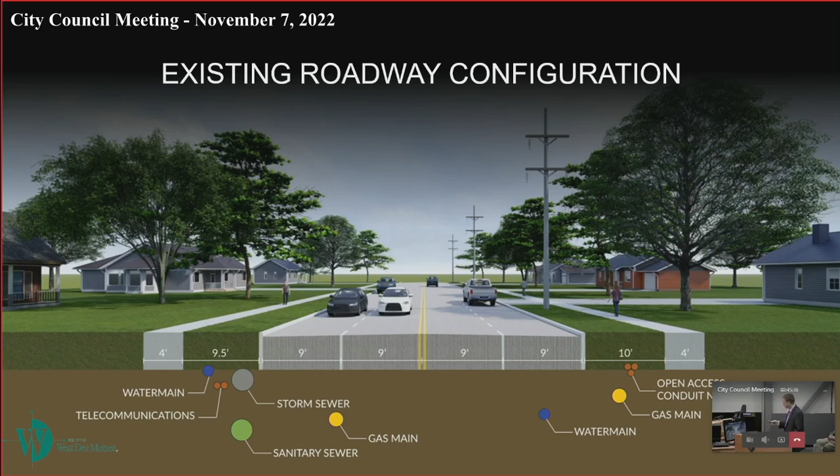As Brian mentioned, the plan is to change to 3 12-foot lanes. So those 3 12-foot lanes are the same width, 36 feet, as the 4 9-foot lanes. So the road is essentially in the same spot, other than a couple turn lanes that we'll talk about. It adds the shared use path on the north side. So this graphic, you'll see this several times. When you look at this, this is facing east. Shared use path is on the left, that would be the north side. And then we've got some dimensions on here that we'll go over how we got to each one.

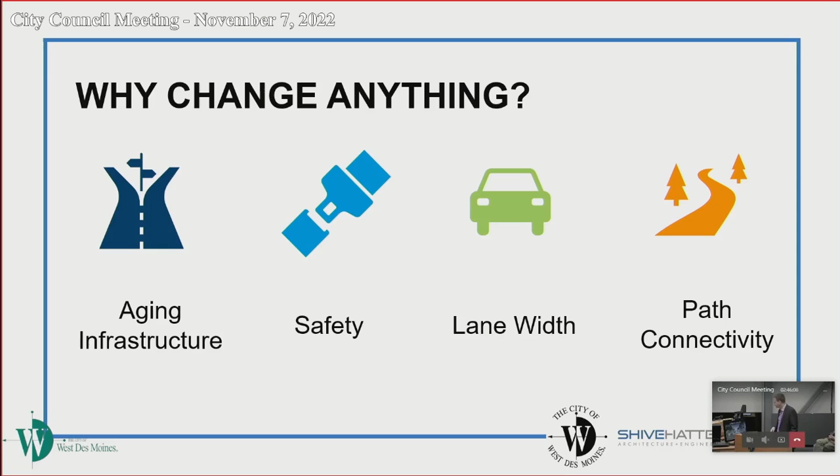So backing up a little bit, what is the need and why would we want to change anything? First, the infrastructure is old. Some of this was paved as early as the 1920s. There was lots of paving done in the 1960s and 70s, some widening and reconstruction. We've done some asphalt overlays, mill and overlay, really just the top 2 inches. Eventually, we have to tackle the whole problem, and while we're at it, we'll fix some of the concerns related to storm sewer and other utilities while we're there.

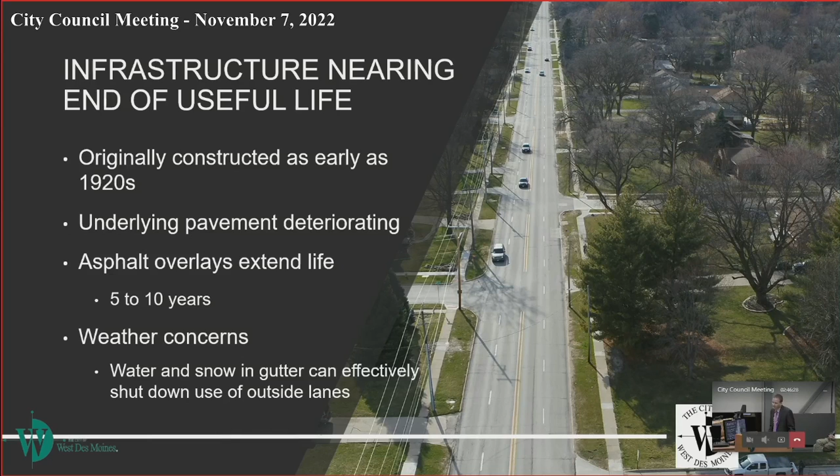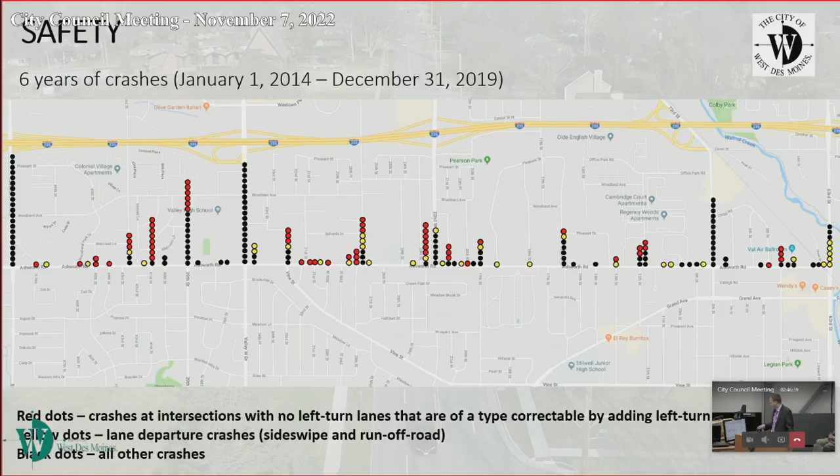Safety is the other part. This is some crash data. The takeaway here is the red and yellow dots are preventable with the type of work we're planning to do here. We've got a lot of detail on those accidents if we need to go into them. I'm not going to talk about these specifically - Eric Peterson, Principal Traffic Engineer for the city, has a ton more detail here as well.

So talking about the safety benefits, the 4 to 3 lane roadway conversion that Brian mentioned - the biggest benefit there is today when you try to cross that street, if you're on a side street, you've got to cross 4 lanes, 2 in each direction. When you go down to 3 lanes, you have a single lane of traffic in each direction with the turn lane in the middle, so you only have 2 through lanes of traffic to cross. So you cut the number of conflict points in half if you're crossing the street or if you're turning onto the street, as shown in this graphic here.

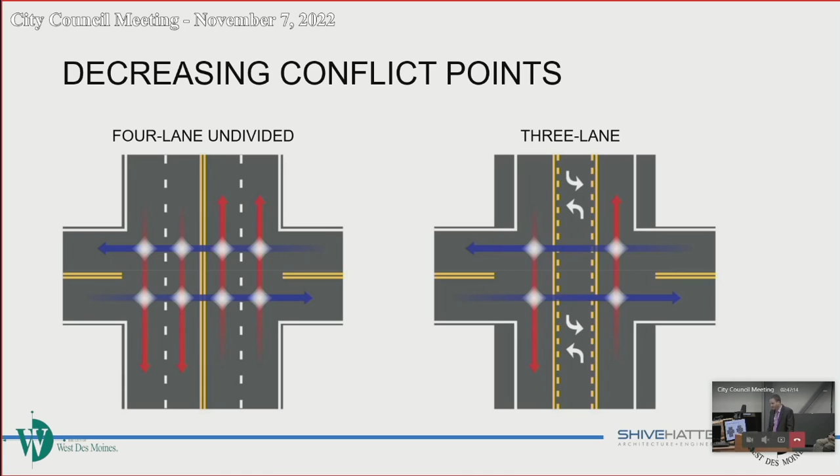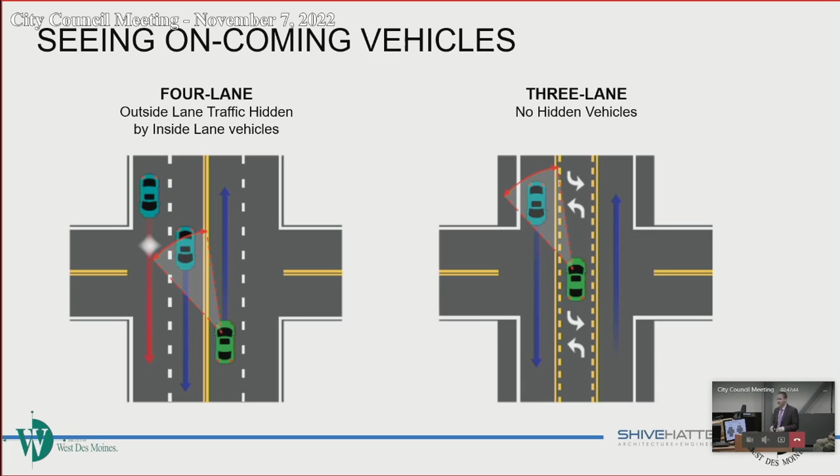Similarly, when you go to turn, if you're on Ashworth and you want to make a left turn, today you stop in a through lane as you signal to go left. You're subject to a rear end collision there. In the 3 lane roadway section, you can move out of that through lane and into the shared turn lane as you wait to make your left turn. When you do go to make your left turn in the condition today, on the left, you have to cross 2 lanes of traffic - sometimes you cannot see the car behind the car in the inside lane, you can't see the car in the outside lane. In the 3 lane roadway section, you only have a single lane coming at you, so you can see all the traffic that's approaching you. This is an example of what happens when you don't have that visibility that you would in a 3 lane.

So this was an accident at 39th and Ashworth in September, right near Valley High School. That black SUV that made the left turn couldn't see the oncoming gray sedan because it was blocked by the cars in the left turn lane.

This is the exact type of accident we're talking about being able to prevent with the 3 lane roadway section. One more point I want to make here, where the SUV ended up, it went over the curb into the grass. So anytime we can put a distance between any pedestrian or bicycle facility that's not on the street, we like to maximize those.

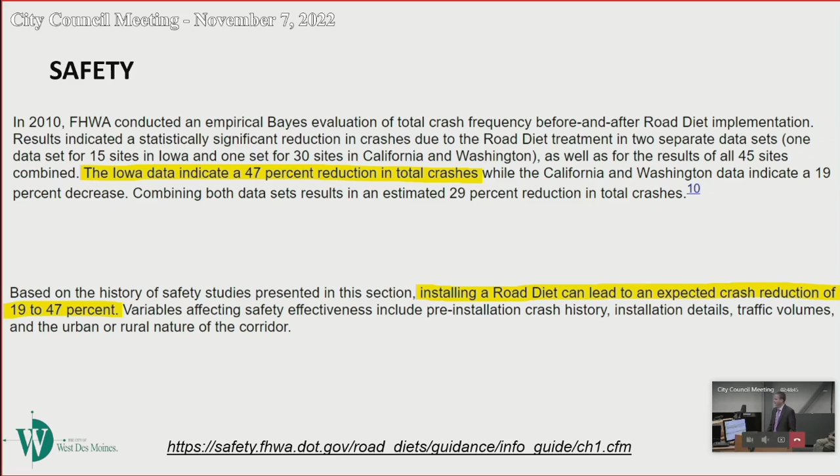Safety data, I'll go through this real quickly: 19% to 47% reduction in crashes when you change from a 4 lane to a 3 lane street. That's from the Federal Highway Administration. There's a lot of academic studies that went into that, and that's the data that is the result.

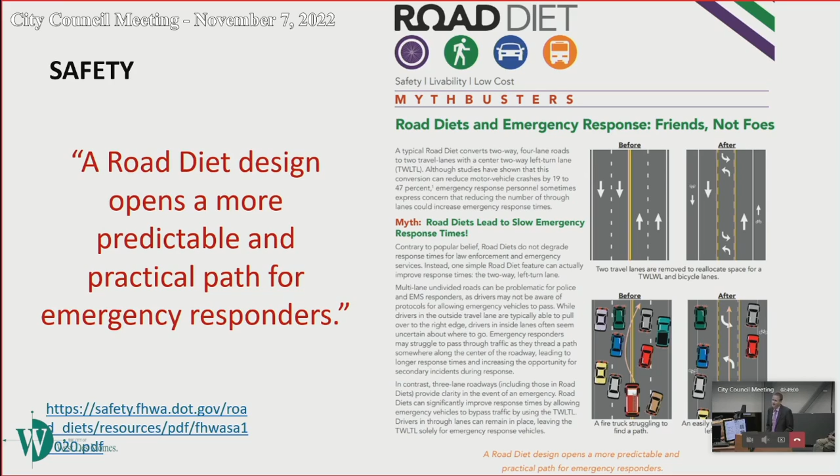Another item on safety: today, when you have a 4 lane roadway, if there's a traffic accident, sometimes that can get clogged up in all 4 lanes because you've got traffic in all 4 lanes. The 3 lane gives a predictable path, again from Federal Highway Administration, for emergency responders. We also spoke to Chief Leu. He agrees and supports the 3 lane roadway section as far as emergency response goes in the city of West Des Moines.

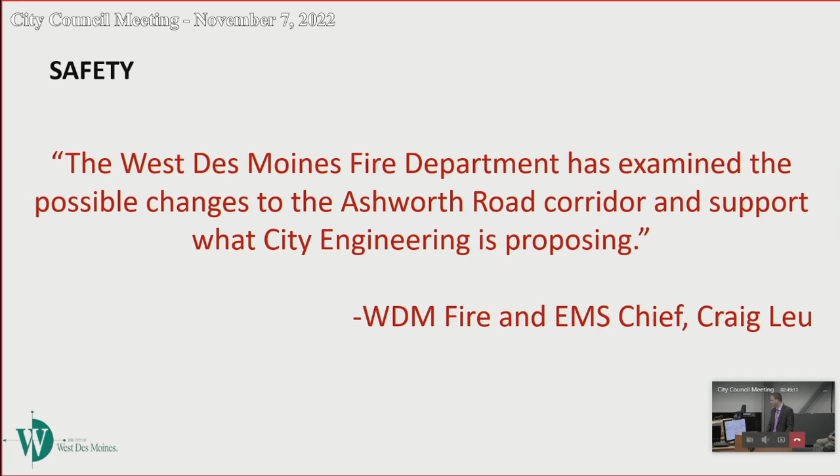What we see a lot of times, because people are uncomfortable with those narrow lanes, they stagger. The picture on the left is vehicles staggered: one in the outside lane, one in the inside lane, one in the outside lane, and they just drive that way. So a lot of times it functions more like a two-lane street, which supports the three-lane ideology where there's one lane in each direction that can still operate efficiently. Photo on the right, when they do go to pass, they hang over the lane line, actually in oncoming traffic in that scenario.

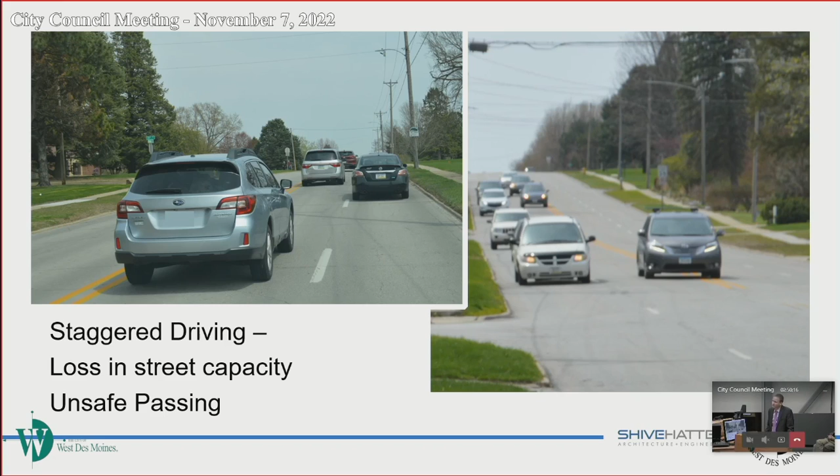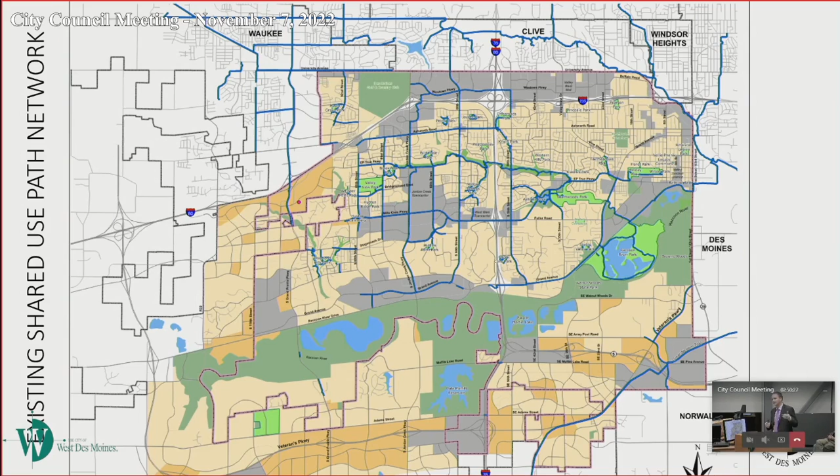The path specifically: this is the map of the whole city. The bottom and left sides are mostly undeveloped. Where you see all the blue lines, that's the existing shared use path network. As we zoom into the upper right-hand corner, this map is bounded on the left by Jordan Creek Parkway, south by Mills Civic Parkway and Fuller Road, and the city limits on the north and east. North is up here. The upper right-hand corner is the area we're talking about. It's a trail desert; there are no trail and shared use path infrastructure existing today in that area.

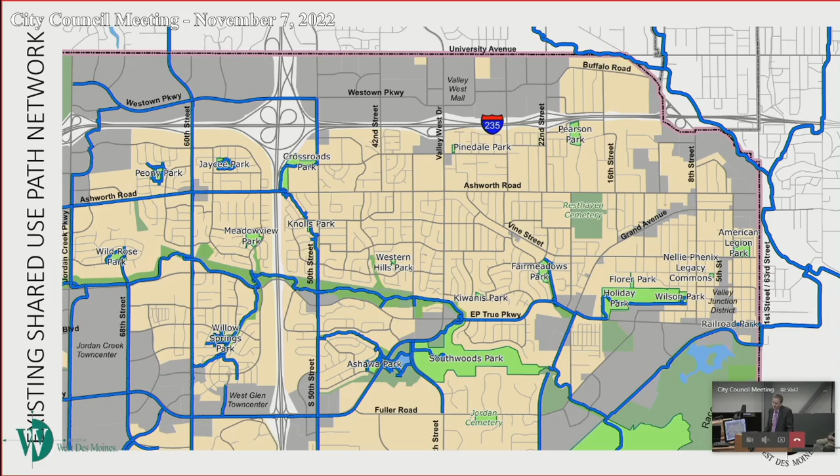When I change the slide here, there'll be a red line in that spot. That red line is where we're talking about putting this. That becomes the backbone for any future shared use path, bicycle infrastructure, and trails in the area.

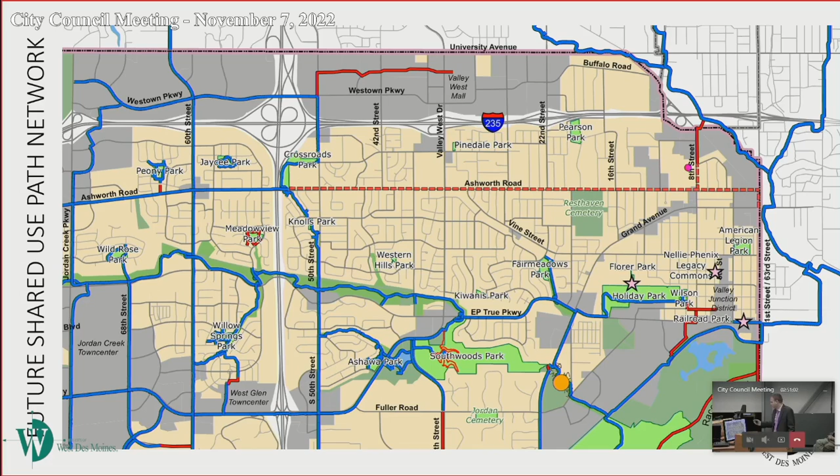Current city master plan for shared use path and trails is this document here. A lot of these are on the side streets that connect to Ashworth, 39th Street, 19th, a couple others. Those aren't planned now, but without Ashworth as the backbone, there's nowhere for those to go. The Ashworth Road is kind of the linchpin to be able to get a shared use path network to provide the same level of service to this area of town as provided to the other areas of West Des Moines.

There's no other spot to get east-west across that portion of the city. No other east-west road goes all the way across, and there aren't any greenways to put the trails in.

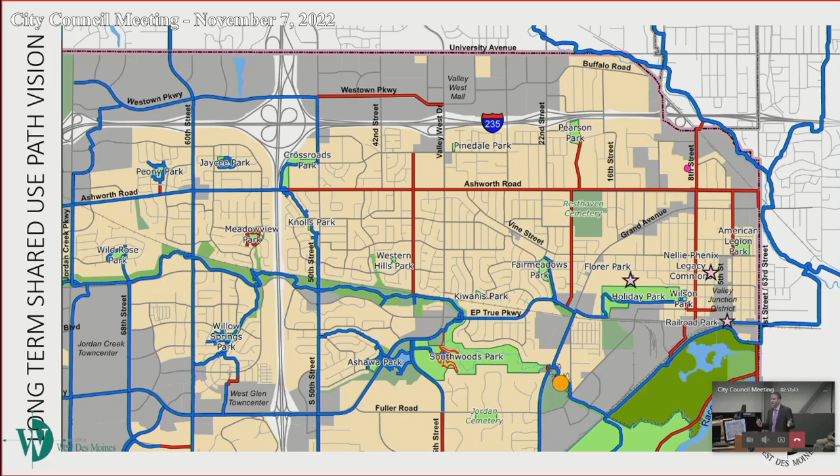So that's credit to all of you, staff, and even the residents, about the great job the city of West Des Moines does. And because of that, there's only one high priority listed for any city department in the whole city, and that's street maintenance. So we're hoping to take care of that here with the road project.

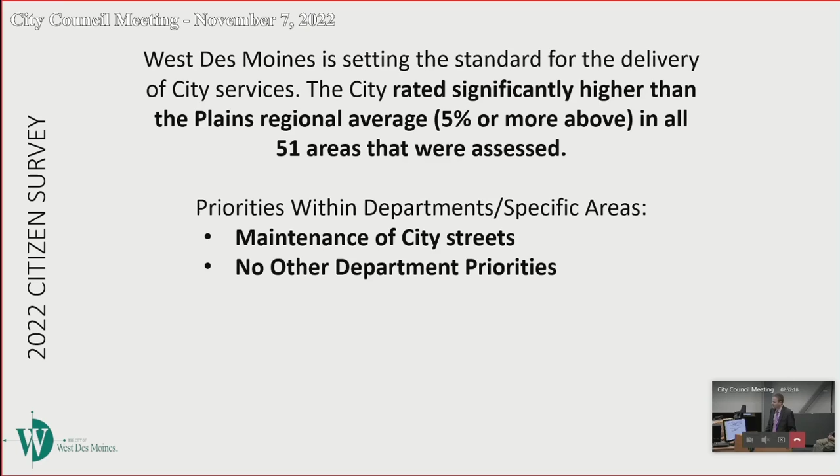But when we actually dive into trail and Parks and Rec, there are areas for service that need to be emphasized in lots of different departments. So for Parks and Rec, number one and number two are walking and biking trails within the city, and access to desired destinations via that network of walking and biking trails. Those are consistently the number one and number two Parks and Rec services that people ask for in these citizen surveys, far and away above all the others.

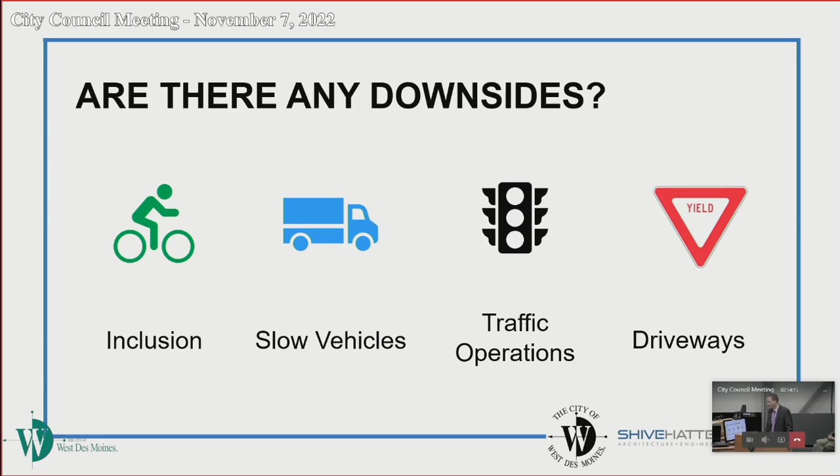So the first one: on the road today, there is no dedicated bicycle facility. Yes, you can ride on the sidewalk, that's legal. Yes, you can ride on the street, that's also legal. When we drop from 4 lanes to 3, though, we're taking away that lane that bikers do use today, and putting all the traffic into one lane. So right now, if there's a bicycle in that outside lane, people can pass using the other lane because you've got 2 lanes in one direction. That goes away in the 3-lane roadway section.

So we're really taking away some comfort—even the bikers on the street today will probably feel less comfortable in the 3-lane section, because they'll be passed in what is essentially the center lane, which is not a passing lane. That's why, if we don't put the shared use path in, we can't provide for that mode of transportation at all. Yes, it's legal to ride on the sidewalk, but no, it's not designed for that. The shared use path is the only portion of this actually designed to accommodate a bicyclist. Without it, we don't accommodate that mode of transportation.

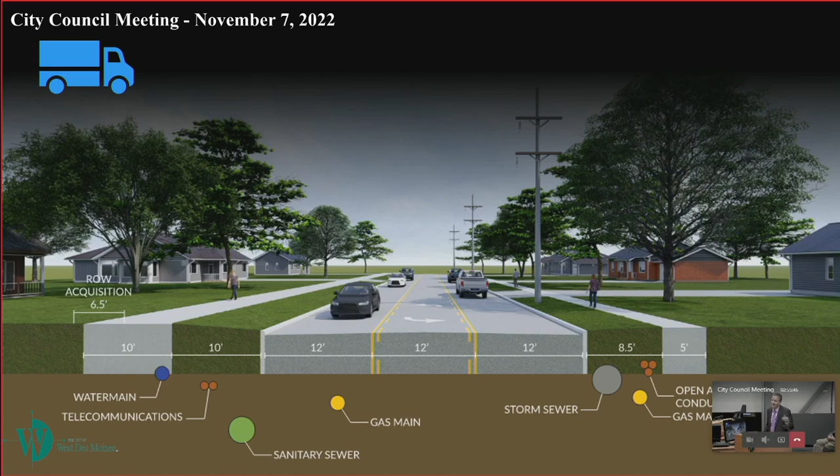Slow-moving vehicles are another concern, similar to the bike in the outside lane—if a delivery truck stops out there, how do you get around it? That's a concern, and we'd expect people to pass in that center lane. Now, that's a stopped vehicle, not a slow vehicle like a bicycle might be. But on the flip side, with that single lane, when there's a slow vehicle, or even someone driving the speed limit, the person who today would speed down Ashworth using both lanes to merge in and out gets caught behind anyone driving the speed limit. So potentially the highest-end speeds will come down with the 4-to-3 lane conversion.

So it's only 2 right turn lanes in this entire stretch? 19th and 22nd, 2 that do not exist today. Valley West, 8th Street, some of those exist today. Okay, only 2 additional, yes. 2 additional.

The other part, relative to the path, there's a lot of driveways and street crossings out there. It would be great if those didn't exist and we had a shared use path or a trail without any obstructions, but there just isn't another spot for it. There's nowhere else to put it.

Ma'am, I'm sorry, I'm going to interrupt. This is exactly what I'm talking about. I understand you're adamantly against it, and that's fine, and I respect that, but I'm going to ask no outbursts. You'll have your chance to speak.

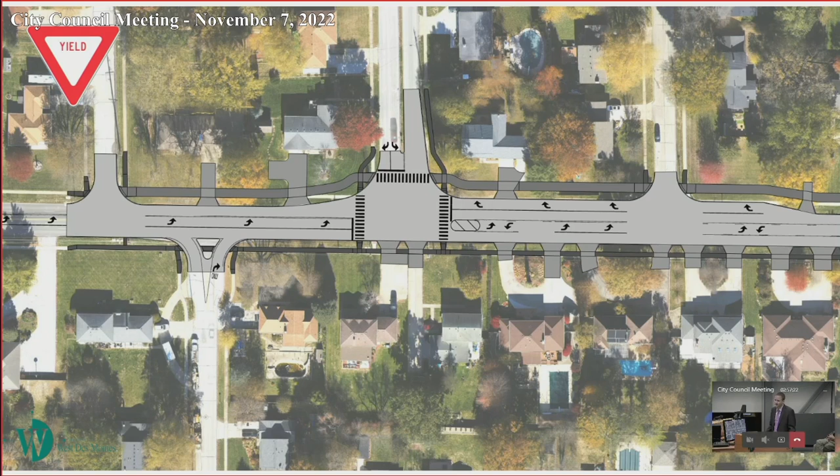It's also not uncommon to have a shared use path cross driveways and streets. They're found along almost every collector and arterial street in the city of West Des Moines, and any new street has them as well, of that classification.

The other negative is right-of-way acquisition. We're going to talk a lot about this, I'm sure, and we'll hear it. This is a slide from the 19th to 23rd public meeting. In that stretch, the first project to be built, we've got enough design done that we know what we need for right-of-way acquisition. That may change here today, and that's fine, but we don't have the design done elsewhere. We wouldn't say that, but we have enough done to talk to homeowners about the specific needs and get appraisals done.

When we have an appraisal done, there's a professional real estate appraiser hired by the city. They go out and appraise what this piece of right-of-way is worth, what is the value of anything in it, trees, landscaping, et cetera, whatever it might be. What is the value of the overall property? Is there a diminished value when we're done? We take all those things into account. Residents have the opportunity to meet with those appraisers. They also have the opportunity to seek their own appraisal if they don't agree, before we move into the negotiation phase and eventually transfer of title if needed.

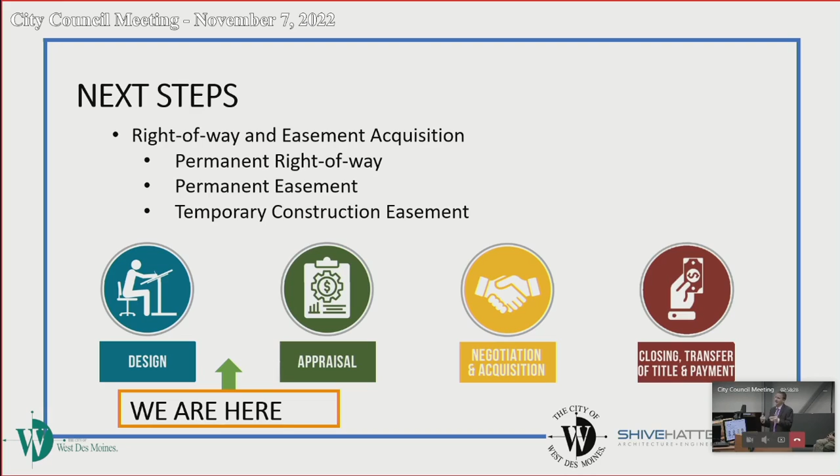A couple things on property value. There's some data from the National Association of Realtors and National Association of Home Builders about amenities like shared use paths and trails being desirable when people seek homes. Again, those would probably be better in a green space. That doesn't exist, but that doesn't mean they still don't want access to them in this whole area of town.

Furthermore, there's some data out there about the roadway conversion itself, the road diet, 4 to 3 lane conversion, showing those don't impact property values negatively. In fact, I think the road today, when you go out there, feels like a busy street even if there's no cars, because it's got 4 lanes. It'll feel a little more like a collector street, which is a lower classification of roadway, when it only has 1 lane in each direction.

Potentially feels less busy. So what are the details and where do we get the guidance from? So, again, this is the configuration.

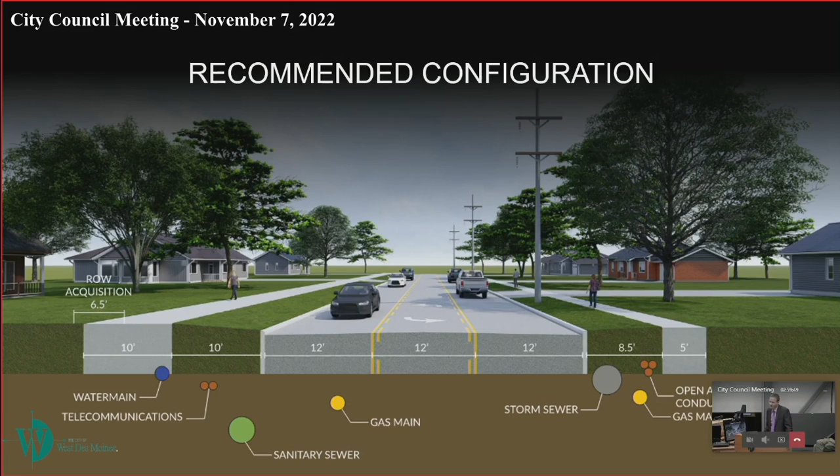We're going to try to walk through how we got the numbers on here, the 12 foot, the 10 foot, all those things. There's a lot of guidance out there. Some of the guidance is national, some of it's local. We end up using the local data or the local guidance. The local guidance, though, comes from the national guidance. The national guidance takes into account all the research on the subject, and then we rely on those to follow through. And then they're all guidelines. We can make changes to them as we need.

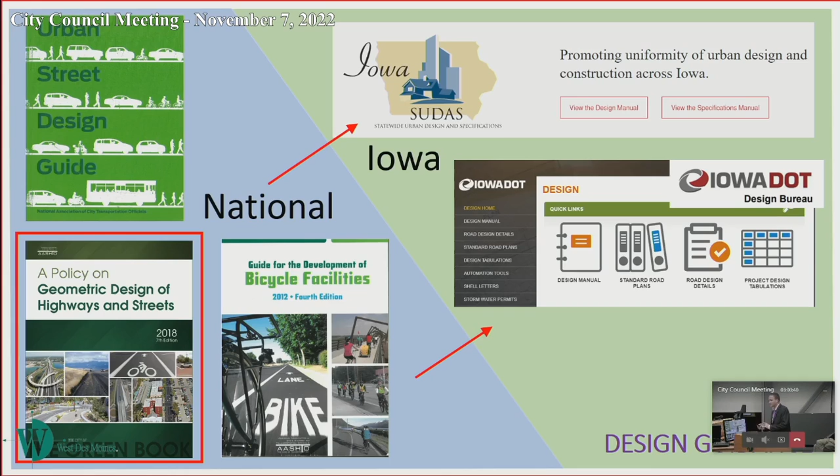One of them in particular, in the bottom left-hand corner, that one takes into account lots of different context, what the land use is, what the speed limit is, is it urban, suburban, rural, and a lot of that data flows down into these guidance. So one on the top right, that's SUDAS. That is an Iowa guidance called Statewide Urban Design and Specification, SUDAS. We'll talk more about that. And a lot of the items come from that SUDAS document, but the national guidance flows into those and how it's applied in Iowa.

So I want to talk a little about SUDAS values and lane width. So the top is the preferred values from SUDAS for this type of road, this classification, residential, 35 mile an hour speed limit, minor arterial, and how wide things should be. So total is 43 feet. So that's 12 foot through lanes, 14 foot center turn lane, 2.5 foot curb offset on each side.

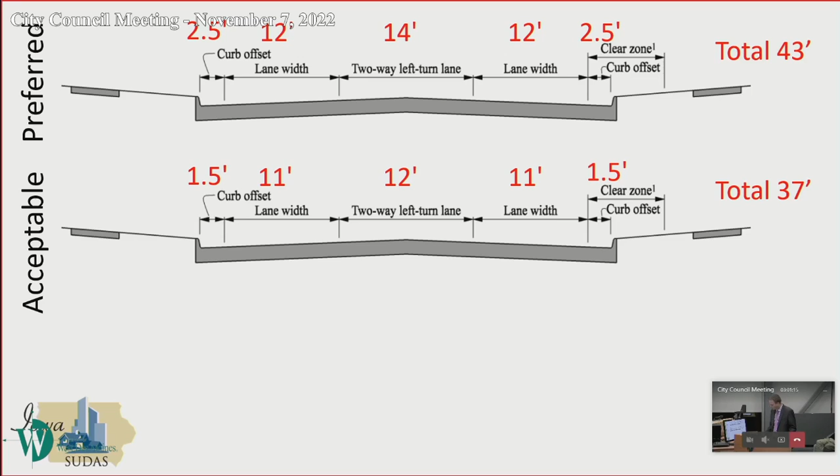Acceptable guidance in SUDAS, the next one down, totals 37 feet. All the numbers shrink down a little bit. So I talked about before, we're actually proposing 36 feet. So we're smaller than what SUDAS would say is acceptable. Acceptable is their lowest level of guidance.

Now, I think someone could say, well, is it actually going to work? Yeah, we believe it will. There's other 36-foot wide 3-lane streets in the city of West Des Moines that function just fine. The point I want to make is we've narrowed the roadway as much as we could, and I'll talk more about that and some alternatives here in just a few minutes.

And the biggest difference is that curb offset I've highlighted in yellow. We set that at 0. So when we saw that DART bus shying away from the curb, that's because there's not a gutter section or an offset from the lane width to the face of curb. So you can't just look at the lane width being 12 feet when you consider how wide they should be. If we called these 10-foot lanes with a 2-foot curb offset, we'd have the exact same width. And it'll really function more like a 10.5-foot lane or maybe an 11-foot lane than it will an actual 12-foot lane because we don't have that guidance on the side or that offset on the side.

Is that just a semantic difference for the most part, going back to that, just out of curiosity? Yeah, I mean, we could call it 10-foot lanes, 2-foot offset, and it would, again, be the same thing. The standard, if somebody comes in to develop a new collector street, and they say it's going to be a 3-lane roadway section, it's the same 36 feet, 3-12s, that's done. And how we name it, it's a little bit less confusing when we call it this way, because if you go out there with a tape measure and measure it versus if we said, well, 10 and 2, there's no physical delineation there. There's not a line painted or anything like that. Okay, thanks.

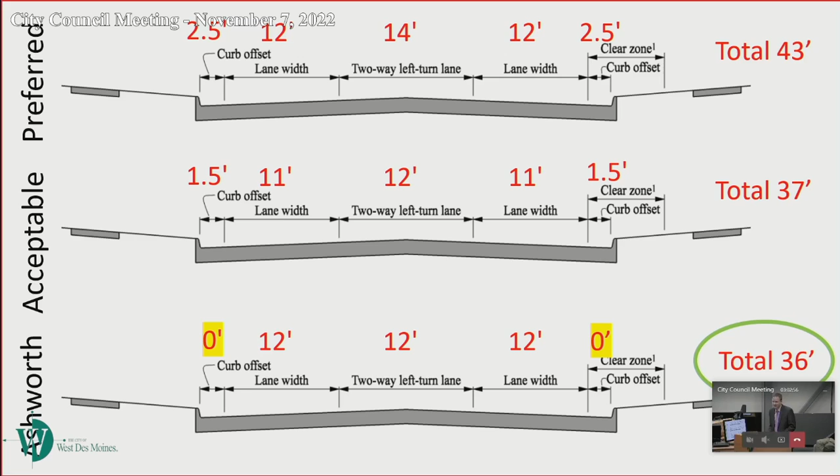Total right-of-way width, minor arterial, if you were to build a new one today, typically 100 to 120 feet to fit everything in, including utilities and all sorts of things I'll talk about here in a minute. This one is currently proposed at 72.5 feet. So we're cramming a lot of stuff into a small space to try to get the footprint as small as we can.

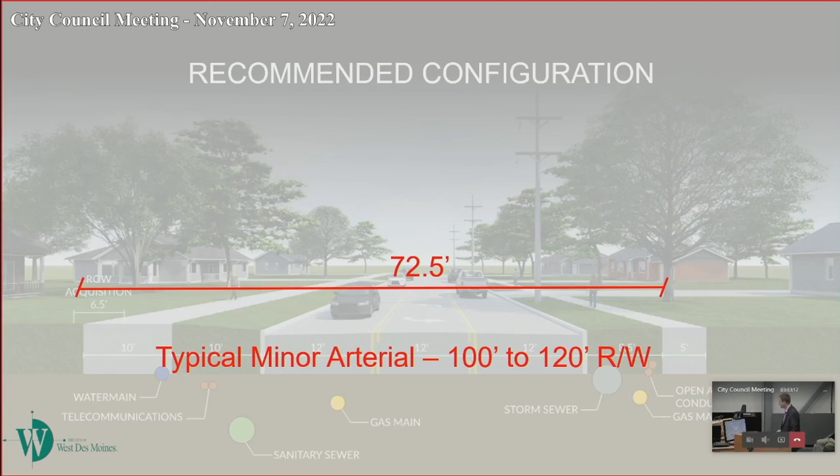One key benefit I want to point out before we get into how we got to all the widths is that once we put a shared use path in, the city maintains it. That's future replacement, cracks, panels, settlement, whatever—those are the responsibility of the city after that, citywide on all shared use paths. The city also takes care of snow removal for all the property owners there. If you have a sidewalk today, you clear the snow. If you have a shared use path, the city clears the snow.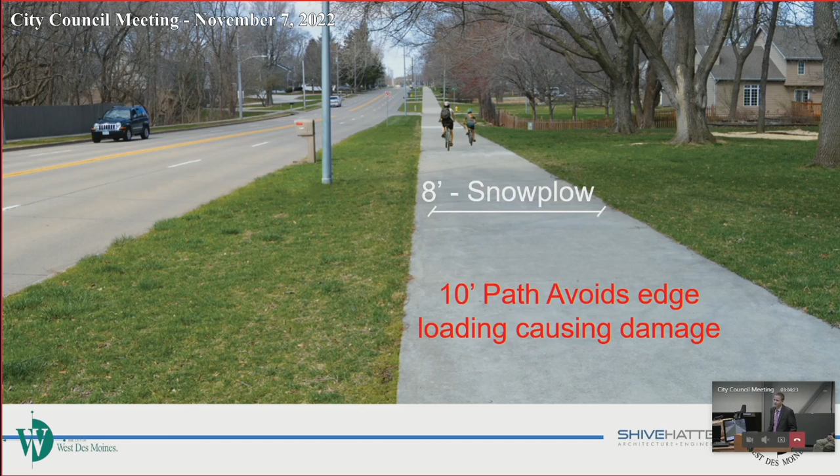So the path is planned at 10 feet wide. Part of the reason is that snow plows are about 8 feet wide, and we don't want them driving right on the edge. If they do, they tend to break the edges of the trail off and crack them, so giving the path extra width prevents that damage. It also keeps the snow plow from getting off into the grass and tearing up people's yards. That's a lot of the reason it's 10 feet, along with guidance from SUDAS, which says to use 10 feet as a typical trail width unless you expect very few pedestrians or don't have regular maintenance vehicles. We don't have either of those—pedestrians are probably the highest use of this potential path, and there will be routine snow removal in the winter months.

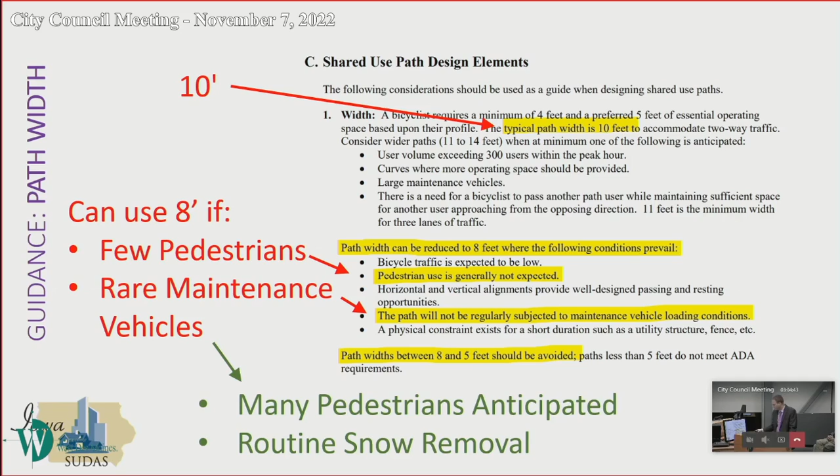So the buffer area, the green space—we showed this at 13 feet through all the public meetings. We did recently reduce that to 10 feet through the 19th to 23rd Street section, and we're going to talk about what's in that 10 feet.

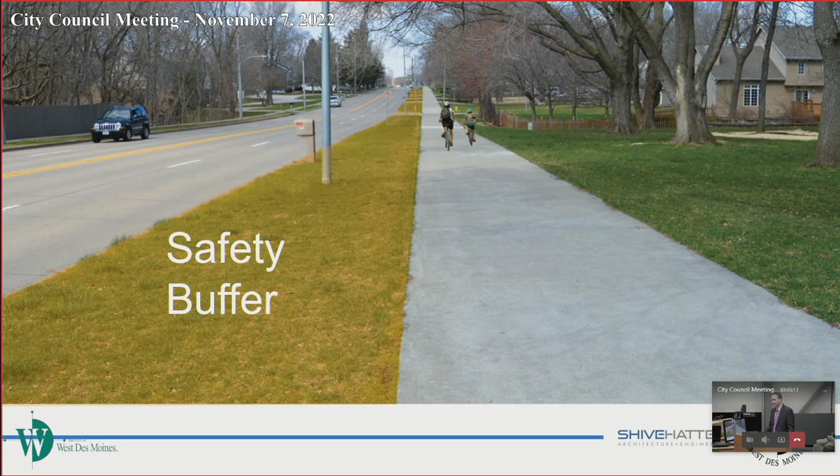The biggest one is a safety buffer. We're trying to keep it away from the street to give people comfort being present there. We talked about that traffic accident—a vehicle leaves the road, where does it go? We're trying to give them a place to get away from it if we can. There are a few things we have to accommodate in there. So 4 to 6 feet is a clear zone—basically we don't want anything immovable in there that a vehicle could hit, like a pole or fire hydrant. Those are out; what I've shown here is fixed objects. Similarly, the trail has a 2-foot lateral clearance—we need it clear of obstructions, even signs or anything that could catch a bicycle handle for somebody going by. So those are all the things we're trying to fit in that area.

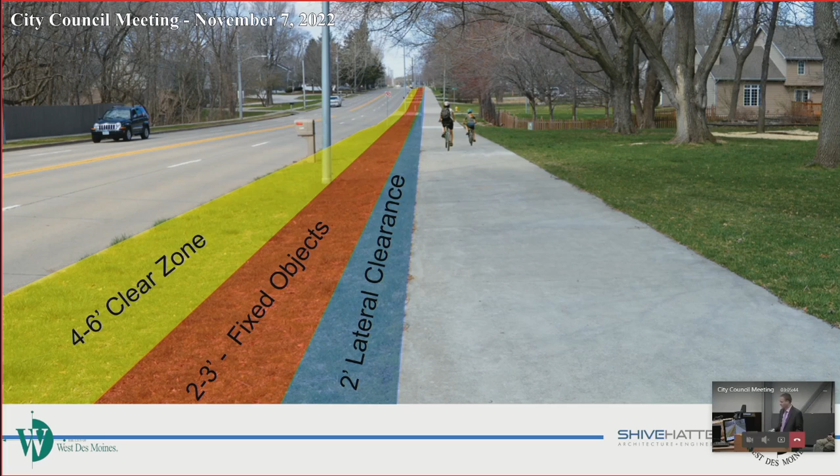Another one is snow storage. We've got to put the snow from the street somewhere, and it ends up in that green space. When the city plows the snow off the trail, it's got to go somewhere too, and it ends up in that same green space. So we need to be able to fit those in there.

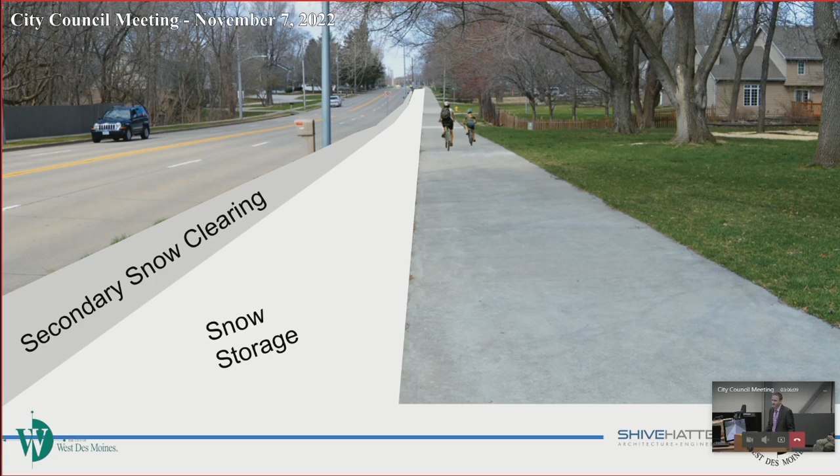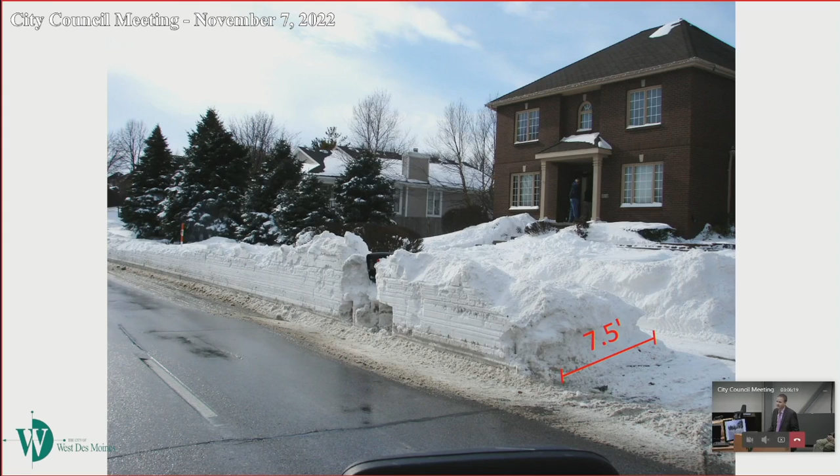And then there's a strip I've called secondary snow clearing. On these arterial streets, Public Services comes back with a wing plow and pushes some of that snow back so they have room for the next snowfall, especially after big snowfall events. So what does that look like? This is on Valley West Drive, a 7.5 foot green space—this one is extreme, but we can get a lot of snow and need a place to put it. Here's another spot on Valley West Drive where it's too close—this is a frequent complaint, where the plows actually throw snow into the path. You can see in the back a piece that's actually slid off. It's just too small.

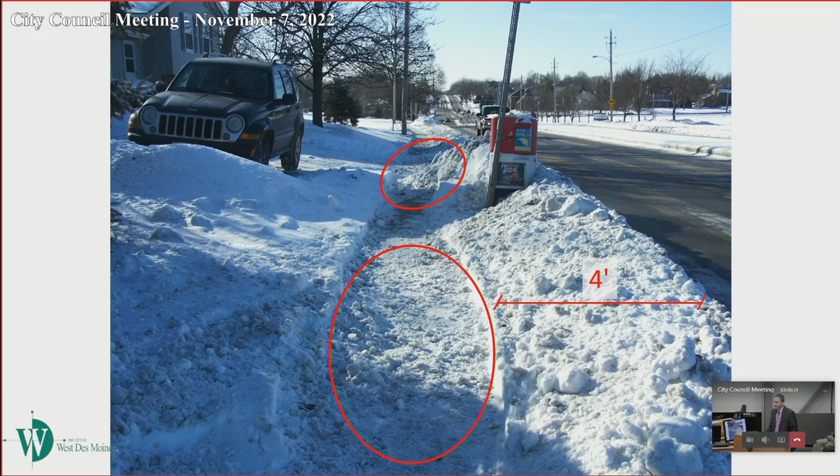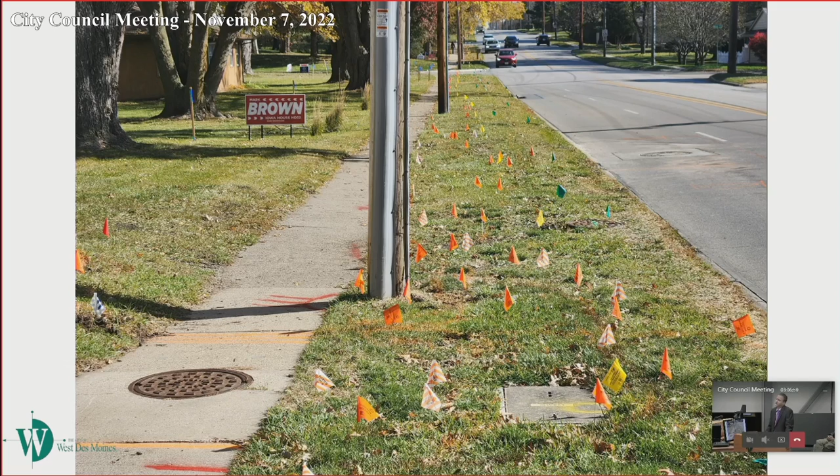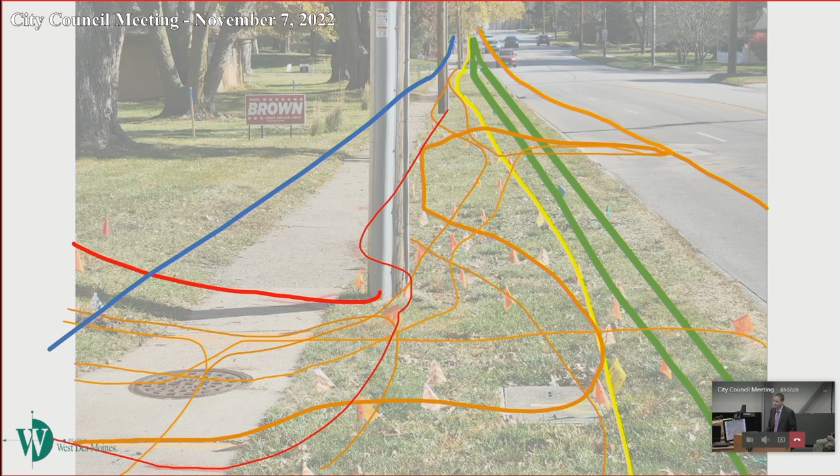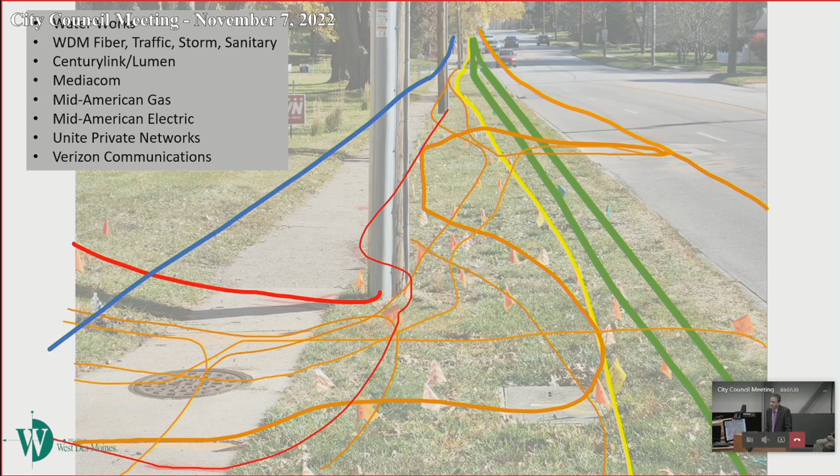Lots of companies out there too - this is just the ones from 19th to 23rd. If you look at that 50-block stretch, there's going to be a whole bunch of people that actually own those utilities. So what else was considered?

Just got a few more slides here. There were lots of things considered. The takeaway I want to leave you with is the first 5 items, or there's 4A and 4B, so there's actually 6 items. This was in the initial study that was done in 2020.

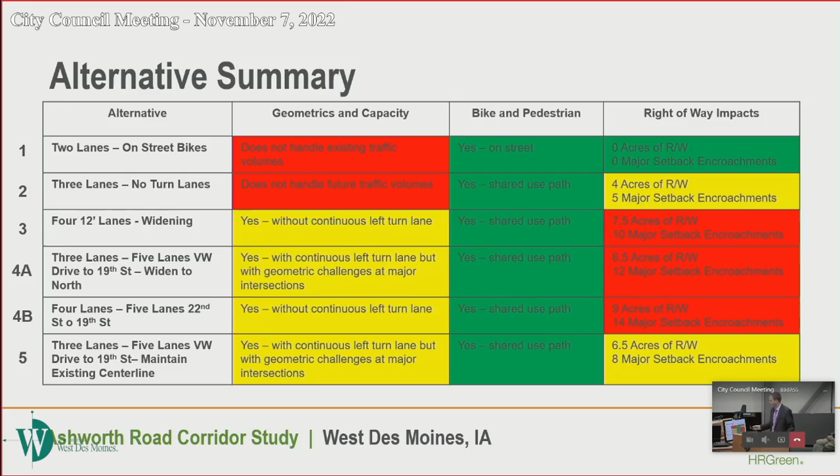When this study got done, it basically said, well, which one of these handles the volume, which one doesn't? There were some recommendations. The first thing staff did was say, hey, we need a different alternative, and they added one that made the roadway smaller. This alternative 6, as it's called in the study, was the smallest footprint of the roadway of all the alternatives considered.

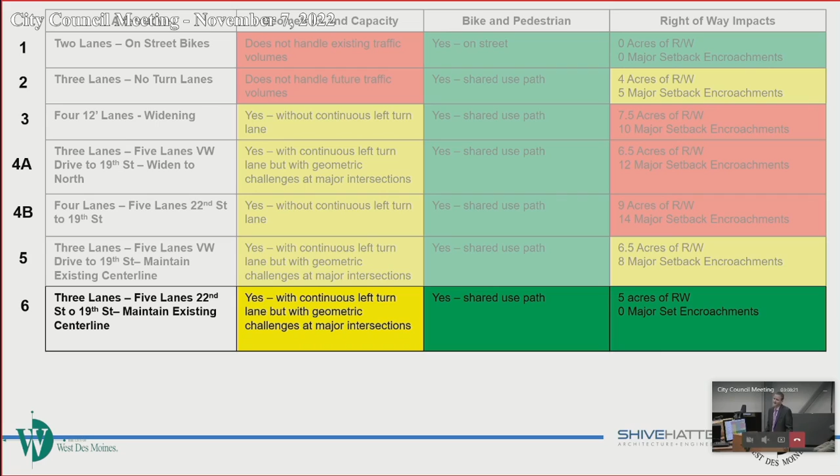Basically what staff said is, let's make it fit inside the existing roadway. The original study used some of the guidance with those curb offsets I'm talking about, and staff said, well, we really need this to fit. They did have 5 lanes between 19th and 22nd in that original study.

Since then, our current version, we've taken that 5-lane section, made it 3, and just have the minimum we need for turn lanes to make it function as it does today. And we've got the right-of-way acquisition down to 2.7 acres from all of those others - I think the lowest one was 5.

So that's a combination of 2 factors: one, going from 5 to 3, from alternative 6 to the current, and moving that trail in from 13 to 10 across the whole length of those 50 blocks. So the takeaway here is the alternative we have today is the smallest of any alternative there was, both in the actual amount of paving and the footprint of the right-of-way acquisition.

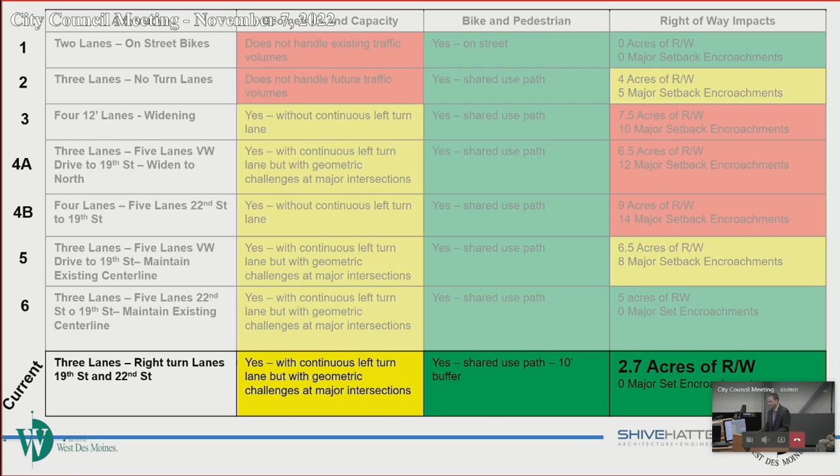We've had a couple public meetings - you went over these, there were 3 of them. Lots of feedback on both sides at all of those, and I'm sure we'll have more today. And you've of course had a lot of feedback. With that, that's the end of my planned remarks.

I would maybe turn it back over to Brian. Okay, Brian, real quick - you're going. Yep, just wanted to talk about some of the feedback I've been getting.

Obviously it was alluded to earlier, there's a number of red signs along the street - happened to be my phone number that was on those signs. I got to know a lot of really nice people in West Des Moines in these past few weeks, and we've had a lot of nice discussions. And frankly, the feedback I've been getting falls right along with everything in the citizen survey.

I had about 100% of the people that talked to me in favor of the 3-lane conversion. They think the lanes are just too narrow now, they know it's going to be safer, they talked about their young kids learning how to drive and that sort of thing. That's the kind of feedback I got.

As far as the trail goes, 75% of the people I talked to were in favor of the trail. I have all the names, addresses, everything - if anybody wants to see that, I'd be happy to share it with them. So I wanted to give that feedback.

I don't know that I have anything else. Do you want to maybe address some of the questions and concerns that have been sent in, emailed, that you've responded to, maybe for the benefit of everybody here, Nate? Sure. Yeah, Nate did a good job of covering those things as far as like lane widths and everything.

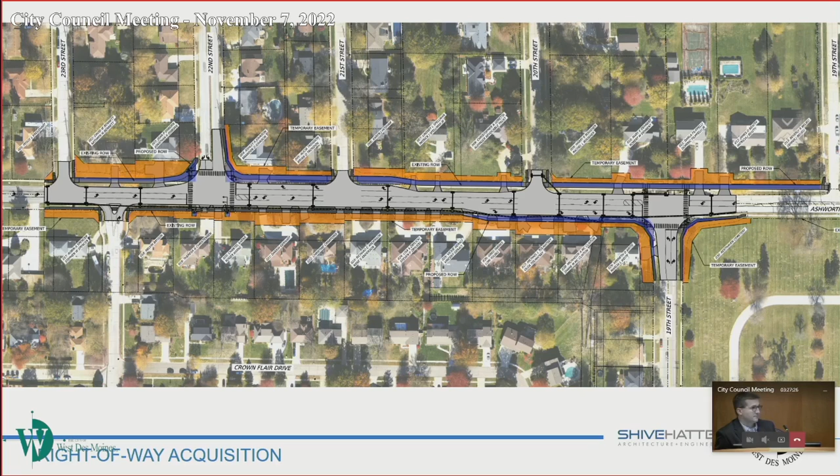It won't be fine - is that what I'm hearing from you? So the guidance says if you go less than 5, you need a physical barrier. It also says to maximize, but the point of showing those utilities is if we slide over on top of utilities that are already there, we may need to relocate them, or we'll have their boxes in the trail itself, and then we may not have room to store snow. So it opens up a can of worms. That's why 10 feet is approximately what's there.

Okay, so I appreciate that. That was really my main question. I know we have a lot of comments about sidewalk and probably roads from the group, but I really wanted to focus on that right-of-way, green space, parking in between. Because if that's where the guts of our city are, and we really just can't move those, that's really important to know. So thank you very much.

Okay, thank you Greg. Can I ask one question on this slide before we move on? No, just kidding. Well no, I just want to - can you explain the color coding, the orange and the blue?

Yeah, the orange is temporary construction easement, so the city would purchase a temporary easement there to help get us through construction. When we rebuild the road and the sidewalk, we're going to rebuild people's driveways, so we've got to have the property rights to do so. That goes away - that's temporary. The blue, and actually this is with the 13-foot trail offset, by the way - this is exactly the slide from the public meeting a month ago. So the blue on the north side will get a little smaller, but the blue is actual right-of-way the city would have to acquire to make this work.

Okay, so now we're at the part of the program where we find out who's for and who's against various things here.

If you are against the trail, I'm just talking about the trail, not the road. If you are against the trail, please stand up.